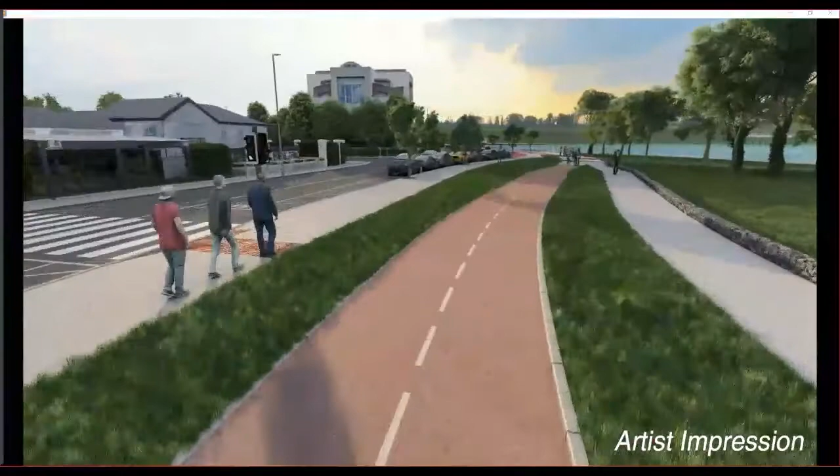Sorry about that, just having some small connection issues there right at the crucial moment. Paul Carroll is my name. I'm the senior engineer in Fingal County Council in the planning department, responsible for transportation planning. That includes forward planning for transportation and transportation projects such as this one. So we're delighted to be here tonight to talk to you about this project from Sutton to Malahide.

We're really grateful to yourselves for turning up tonight and for all the people who've contributed to the consultation so far. This is a really exciting scheme for us. It's been in gestation for a number of years now. We've been working hard, particularly the project team here tonight, in the last 12 months, to refine the design and to really get it to be the best possible scheme that we can to serve all the needs of the varied needs along the route and for the communities along the corridor.

We see this as being a really useful route for everyday travel, for getting around the villages along the route, for getting from one end of the scheme to the other, and also as a more strategic route for longer distance trips, tying into the wider network being built throughout the Dublin area. We're really happy to hear what you have to say tonight, and as part of the consultation we'll listen to everything that's on board. We don't have all the answers, so we rely on the community to contribute as much as they can to make the scheme better for everyone.

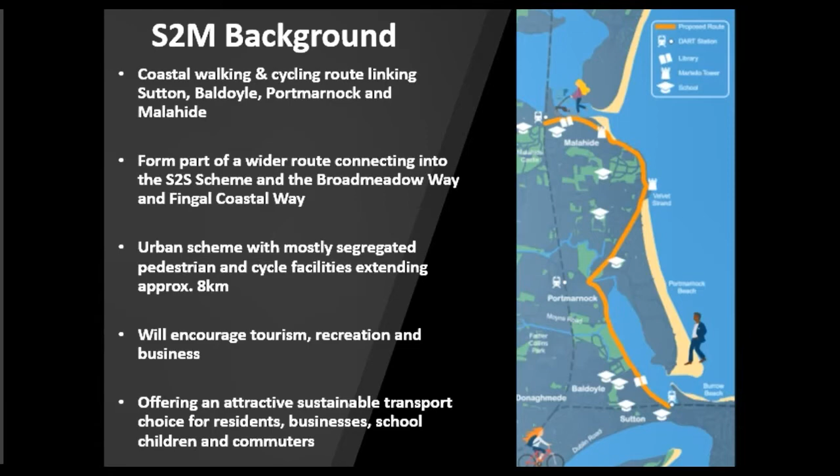It's a non-statutory public consultation, not set out in any legislation but regarded as best practice to consult at this stage, and it follows a feasibility and route options consultation in 2017. The consultation runs for a 6-week period from the 24th of March to the 9th of May. We're consulting on the preferred route preliminary design, to help us complete and develop this design in advance of a submission to An Bord Pleanála in 2023.

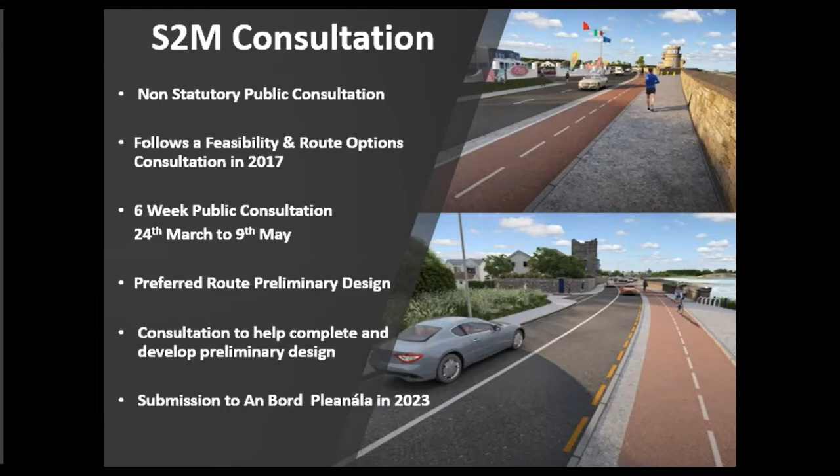Public consultation material includes promotional videos and images to help the public visualise what we would like the scheme to look like on completion. For the most part, these videos and images are a good representation of where the scheme will be. However, other areas such as Baldoyle Prom need further development, and what we've shown along there is conceptual in nature, and we're looking for the public's input into what they would like the prom to look like once the scheme is completed.

We've published a number of media advertisements, including in press and on social media. We've distributed over 17,500 leaflets in the area. We have a consultation portal to receive submissions, which also has an online questionnaire. All the drawings, reports, videos and images are available on this portal. We're undertaking two webinars with questions and answers, one tonight and one next Tuesday. We've also had a drop-in information evening in Portmarnock Hotel last week.

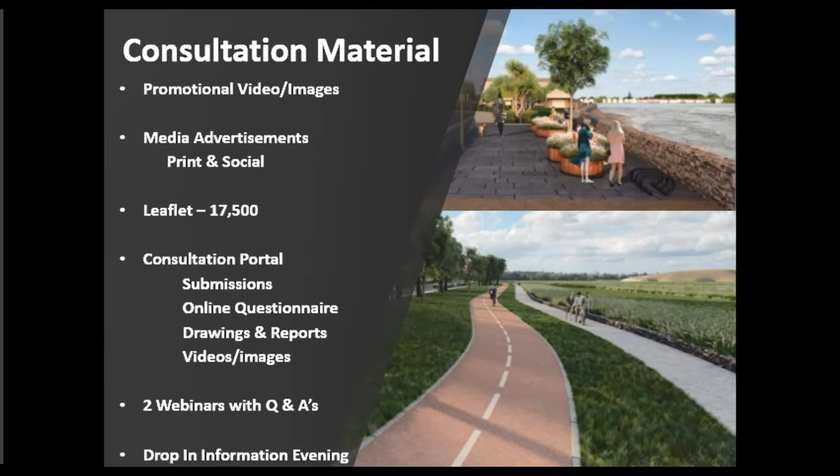The next steps for the project team during and following this public consultation are to identify any issues of local concern raised, consult with key project stakeholders—that'll be an ongoing process beyond this consultation period—review comments, queries and suggestions from the consultation, and publish a public consultation report. This report will contain all the data from the public consultation and report on all the key issues raised.

This will help inform the development of the preliminary design going forward and help us complete an application for planning to An Bord Pleanála in 2023. During this planning application, there will be a further consultation period, and that will be a statutory consultation process.

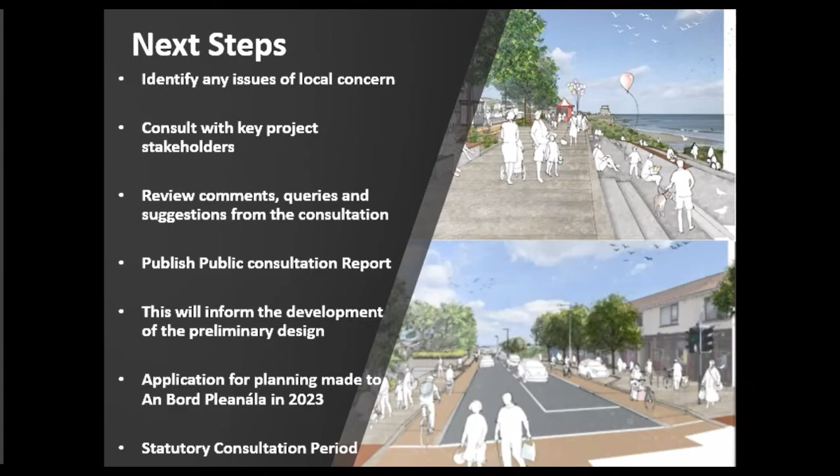A high-level look at the project timeline, available on our consultation portal, highlights some key dates, including a planning application to An Bord Pleanála in Q1 2023. We would hope to have a decision from the board by the start of 2024, and it would take possibly a year for detailed design and another 2 years for construction. So we'd envisage commencing construction in 2025 with a completion date in 2027.

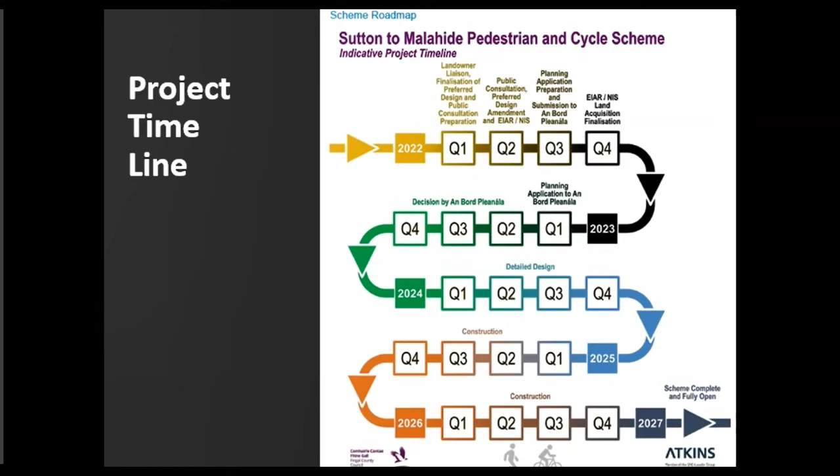Feedback on the scheme proposal is important to us to help make the Sutton to Malahide pedestrian and cycle scheme a flagship amenity. Information can be viewed at fingal.ie/Sutton to Malahide and submissions made through the consult fingal.ie portal. Hard copies are available at Baldoyle Library, Malahide Library and Fingal County Council offices at Swords and Blanchardstown. The consultation concludes on the 9th of May, and again we'd welcome submissions to help us develop the scheme further. Thank you.

The scheme, as shown in the map to the left, routes from Malahide in the north to Sutton Cross in the south, via the towns of Portmarnock and Baldoyle. Some key features include an overall length in the order of 8.2 kilometres, and a scheme purpose to develop a high quality urban greenway that caters for leisure and commuter trips for both pedestrians and cyclists.

Dedicated cycling and pedestrian facilities segregated from vehicular traffic are proposed. This will be achieved through the provision of a vertical kerb and, in most cases, a half-metre wide buffer strip. Pedestrians and cyclists will also be generally separated by means of a low kerb. In some limited cases this will not be possible due to environmental and technical challenges, and in such cases alternative layouts are proposed, including shared path, boardwalk, and shared street arrangements.

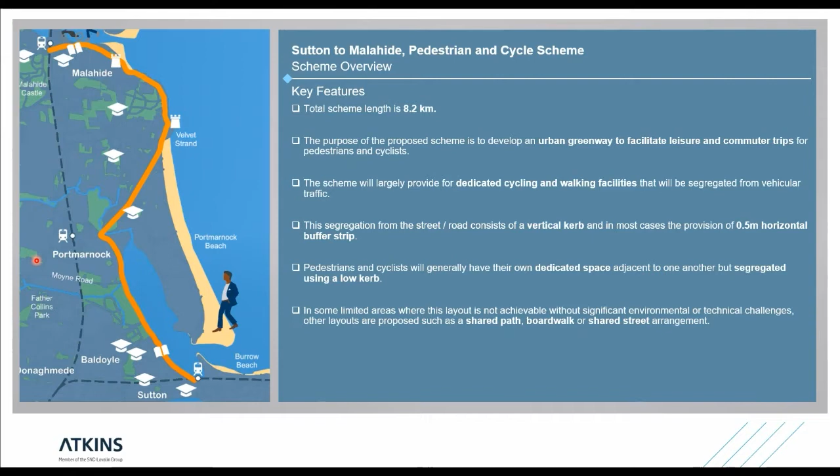Moving on, the following slides discuss the design detail of some sample locations. These locations include Strand Street and Strand Court in Malahide, Velvet Strand in Portmarnock Village itself, and Baldoyle Promenade south of the village of Baldoyle.

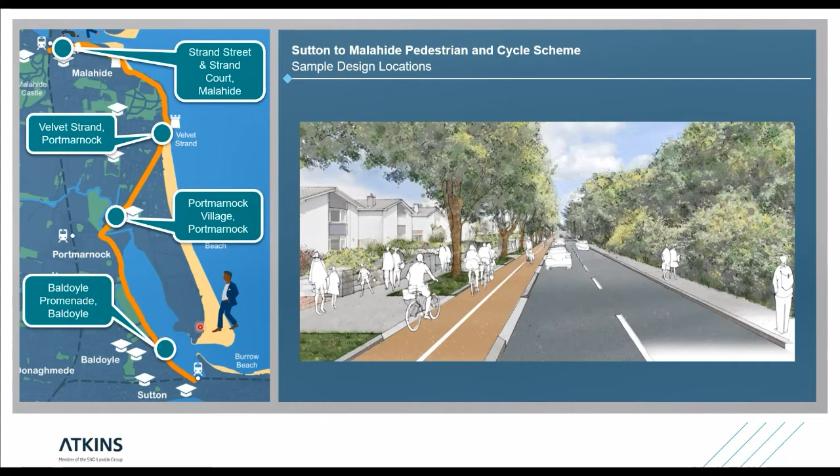In terms of Strand Street and Strand Court, these are designed to operate as a shared street, meaning that cyclists are encouraged to cycle in lane with traffic. To ensure that the streets operate in this intended way, the street design incorporates a number of elements that encourage cyclists to confidently use the scheme in this manner.

Measures include a 1 metre wide high quality paving trim material adjacent to the curb line, which will do two things: visually narrow the carriageway, reducing vehicle speeds, and in combination with a smooth 3.5 metre wide surface along the centre of the street, encourage cyclists to take that dominant position along the centre of the lane. High quality surfacing is also proposed to the footpaths, and this will extend to the raised table areas at crossings and junctions to give a greater sense of pedestrian priority.

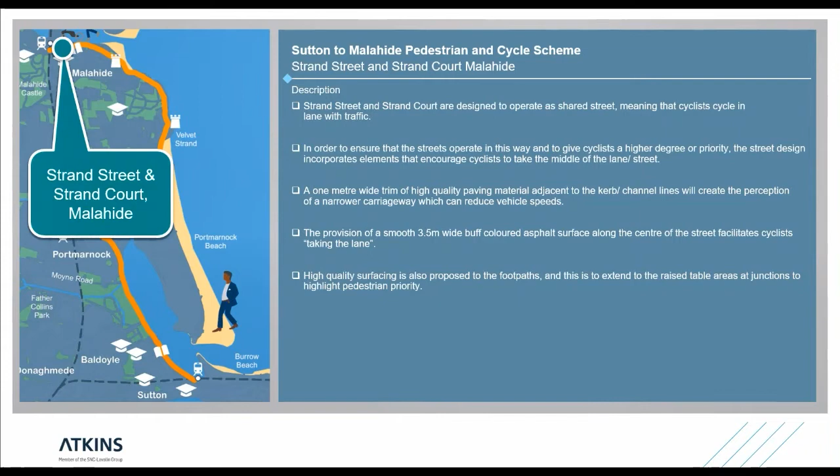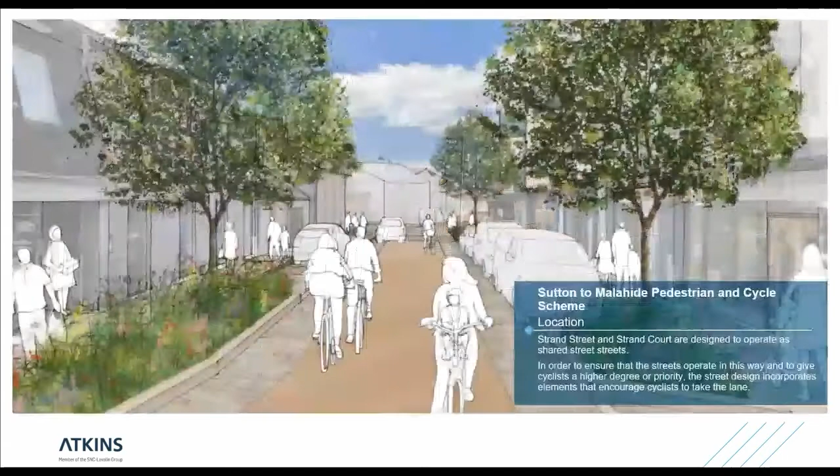In terms of Velvet Strand, the proposals include the provision of a segregated two-way cycle track along the pedestrian promenade, with high quality surfacing applied to both.

At Wendall Avenue, the junction is being revised to be more compact with smaller turning radii and corners, a raised junction table, and upgraded crossing facilities.

The public realm proposals also include the creation of a new terrace seating area at the location of the existing steps south of the ice cream kiosk. This will provide easy access towards the beachfront and offer opportunities for seating. Additional seating will also be provided at other locations along with street planters and low-level planting where space allows.

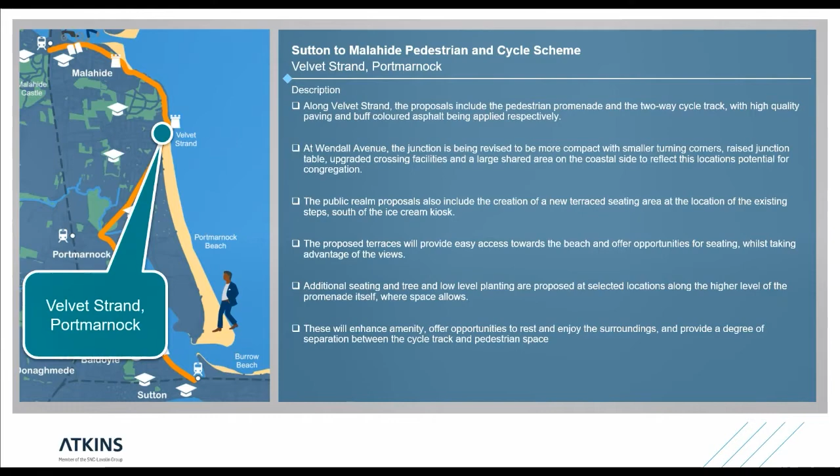The scheme as proposed will enhance amenity, offer opportunities to enjoy the surroundings and scenery, whilst also accommodating a high-quality pedestrian and cycle facility.

The image to the left presents the design opposite Wendall Avenue with the raised table, the crossing, and the transition from the cycle track to the shared area opposite the side road junction. The image to the right presents the layout of the terrace step area and the landscape proposals contained therein.

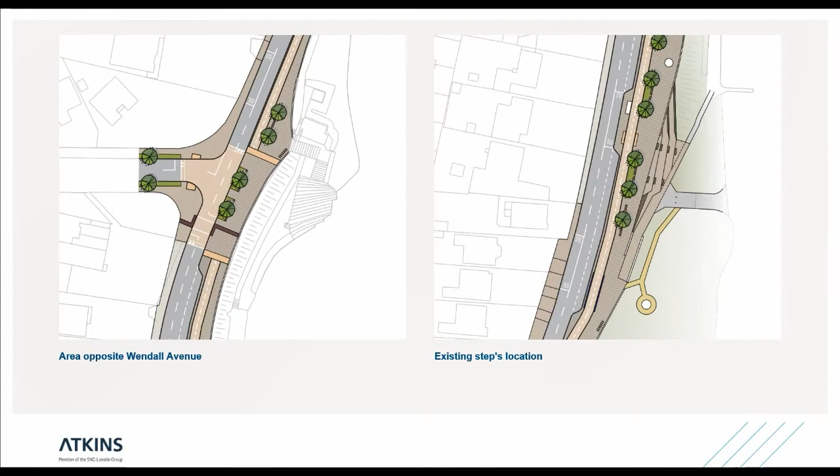This image, pulled from the animation video, presents the approach to the Martello Tower with the two-way cycle track provided on the coastal side.

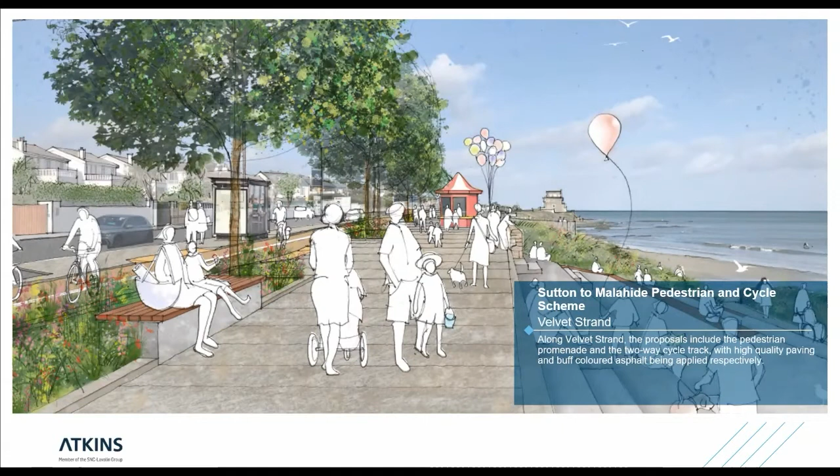This image here presents the perspective sketch adjacent to the terraced area and shows how the two-way cycle track, promenade, bus stop, and car parking all integrate together.

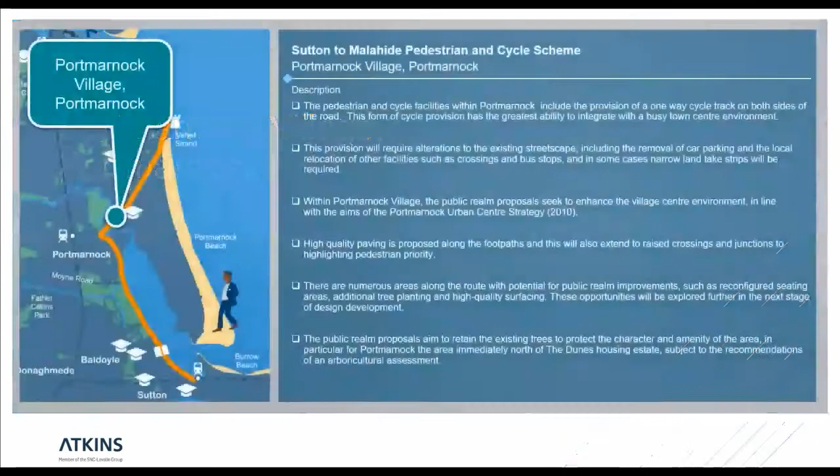Moving on to Portmarnock Village, the facilities here include the provision of a one-way cycle track on both sides of the road. This form of cycle provision has been chosen as it has the greatest ability to integrate with a busy town centre environment such as that of Portmarnock.

This provision will require alterations to the existing streetscape, including the removal of car parking, local relocation of crossings and bus stops, and narrow land take strips will be required along some property boundaries and gardens.

The public realm proposals do seek to enhance the village centre environment, and this is in line with the aims of the 2010 Portmarnock Urban Centre strategy.

High quality surfacing is proposed to footpaths, extending to raised table areas at crossings and junctions to give a greater sense of pedestrian priority. There is also potential for this to extend to other adjacent areas, though consideration of these will be explored at the next design stage.

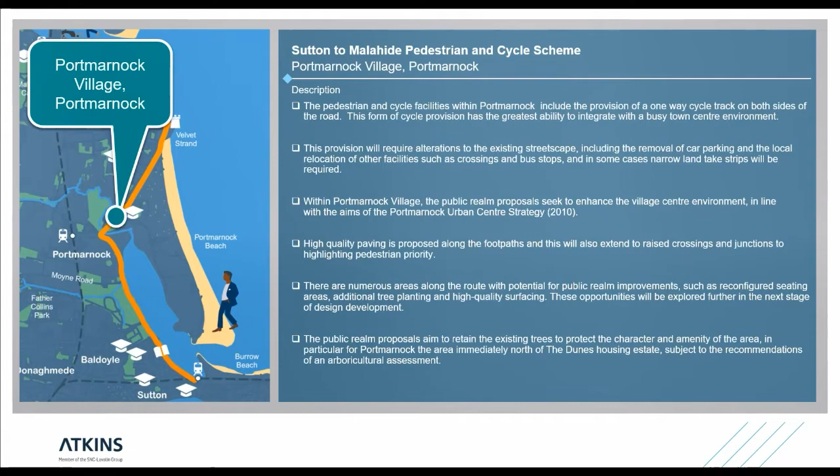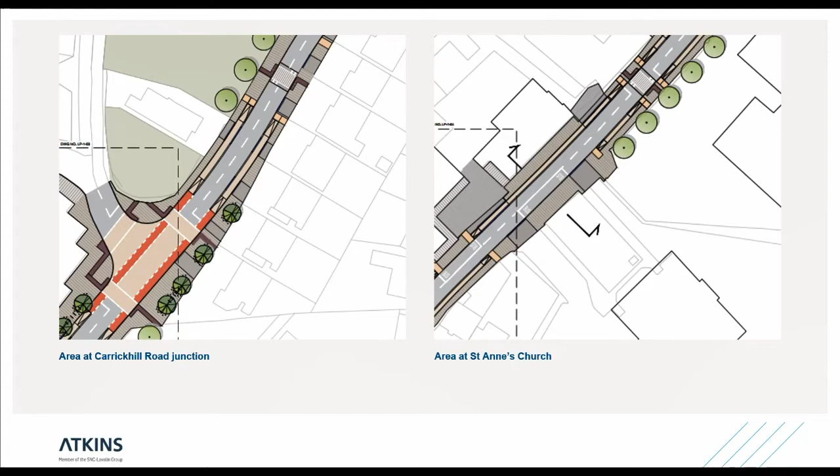The images here: the one on the left presents the junction at Carrickhill Road and how the one-way cycle track on both sides integrates with that junction. On the right-hand side, the scheme as it passes St. Anne's Church is depicted.

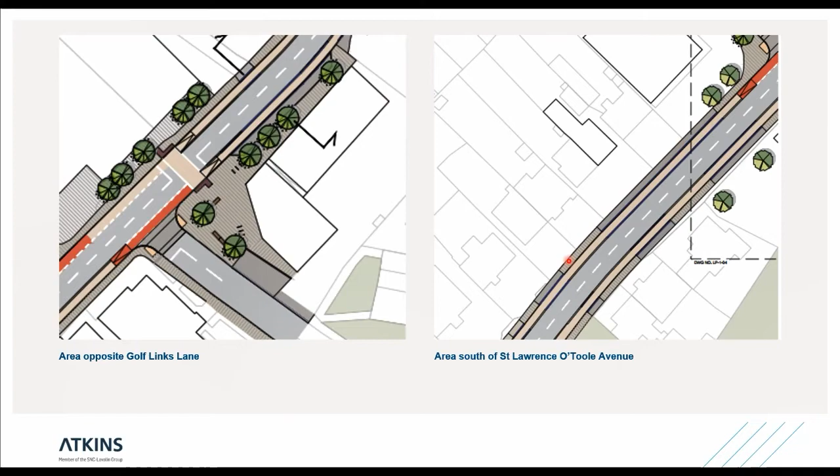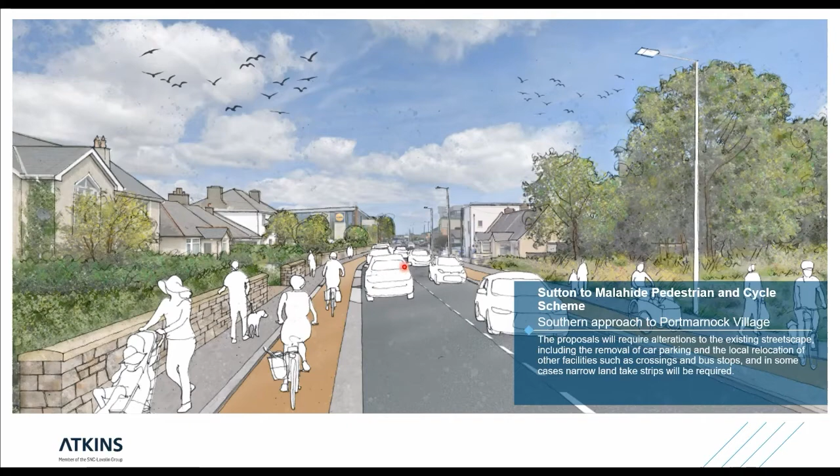The image here shows the scheme perspective within the town centre and how it will integrate with the town centre. This image shows the area in advance of St. Lawrence O'Toole Avenue where land take is required and how the scheme will integrate with the area at this location.

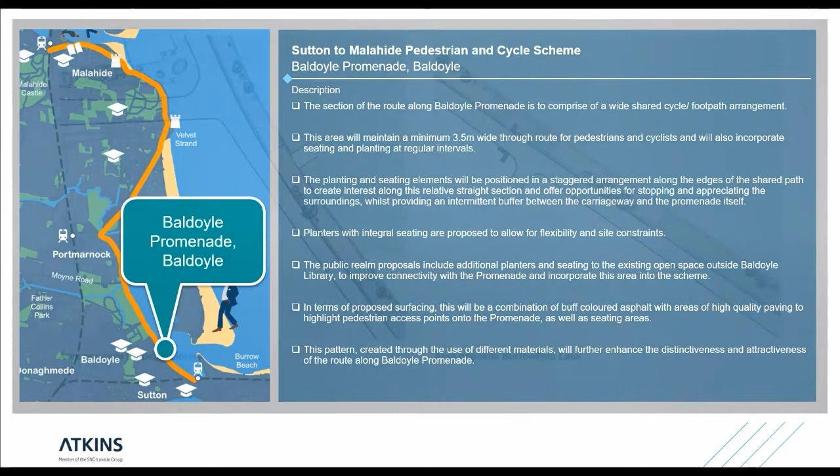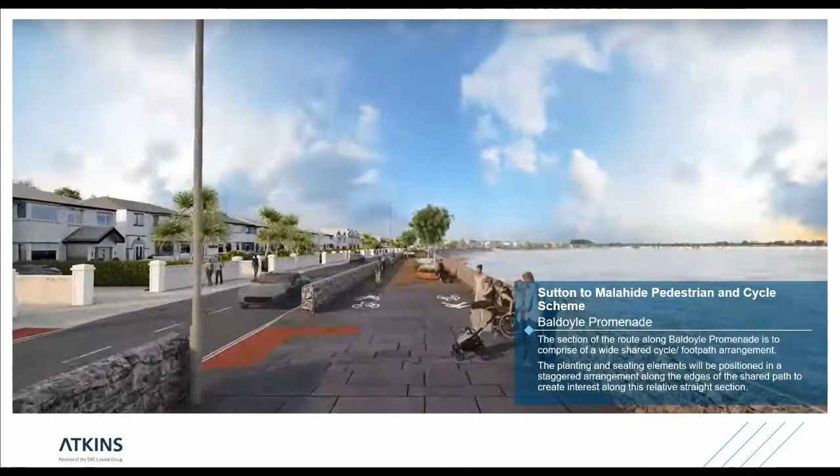The images here show the promenade opposite the Baldoyle Library and opposite the Burrowfield Lane area. This image again is taken from the video animation and gives the viewer a sense of the arrangement proposed along the promenade. And that's my presentation for now.

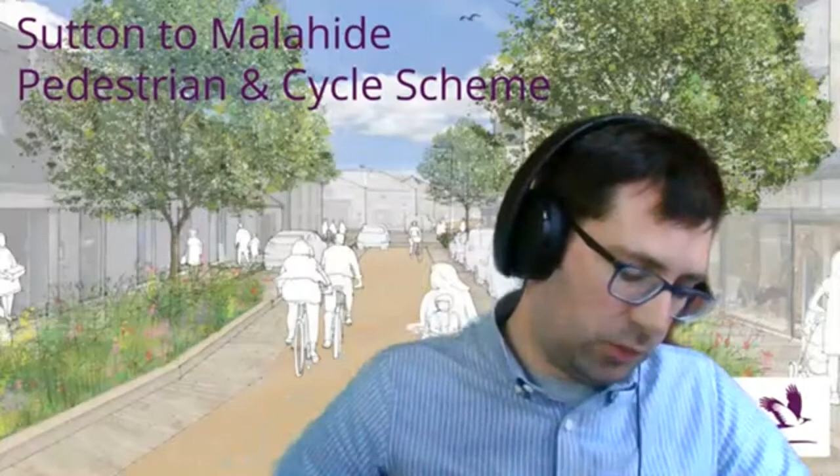I don't have a breakdown of every pedestrian crossing along the route, but maybe this is what the question is trying to get at.

I do have a breakdown of pedestrian toucan crossings where we go from one link type to another in order to progress the length of the scheme. That might be, for instance, where we go from the two-way cycle track on the eastern coastal side over to...

the western landward side. So in terms of that, we have an overall of 5 transition points facilitated by those toucan crossings, including the open section at the Baldoyle to Portmarnock section of the route. That's 5 over 10 kilometres.

So that's one transition point via a toucan crossing for every 2 kilometres. When you look at it from that point of view, that's a reasonable level of transition points between link types and from one side of the carriageway to the other for a scheme of this length.

Thanks Chris, that's really helpful. Just to reiterate, all of the scheme maps and design drawings are available on the consult portal, at consult.fingal.ie, and they can be viewed in full there by anybody who would like to look through them and assess how many crossings they can find in those maps themselves.